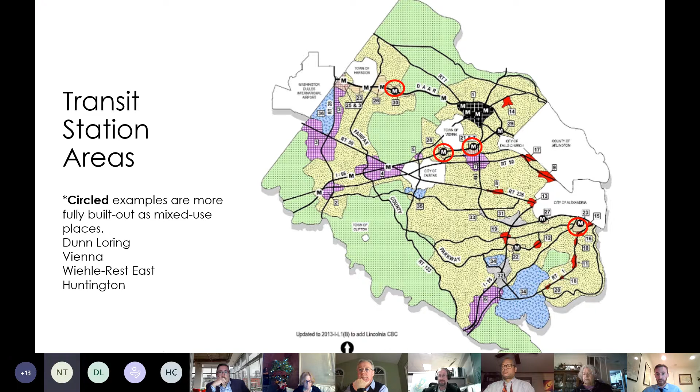And then finally, we'll also talk about Huntington. I think the question to ask when we're looking at this is what's an appropriate mix of land uses around a Metro Station. Best practices from a couple of Huntington TSA locations and others help get at that specific answer.

In general, what we're looking at in all of our TSAs is having some sort of balance between residential and non-residential uses. How that takes shape and what the exact mix is depends on the site considerations and the area of interest. Among all of the examples we're going to go through, there are specific considerations for ground floor uses, retail, support services, those kinds of things. And most, if not all, have specific considerations for the arrangement of open space in an urban context. So those are some of the best practices at the very highest level.

One thing I would reiterate is what we've been asked to study, what the board has asked the task force to study, which is the consideration of up to 1,500 net new residential units on the WMATA site, and then 95,000 square feet of net new non-residential uses. This is looking at both office and retail. One way of looking at that, if you look at proportionally how that might break down across non-residential uses, is about 39,000 square feet of retail.

I think this number is slightly off, so forgive me for this, but a larger amount of net new office space. The form is actually set in the authorization. The total heights are set in the authorization of buildings at 55 to 200 feet in total height.

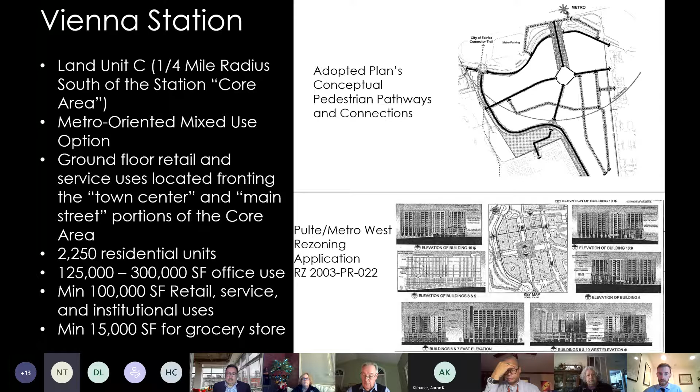At the time that this project was entitled, the comprehensive plan recommended a mix of uses: 40% to 75% residential, and 25% to 60% non-residential. Ground floor retail and support service uses were very much encouraged to add to the vibrancy and enhance the pedestrian environment for this area, not just on the ground floors facing the street, but also in a central plaza, which is the image shown right here. This concept was further illustrated through the rezoning application that implemented this plan option, where you had a proffered land use mix that included ranges for each building, about 2 to 6%, depending on the building, of the total building's square footage dedicated to ground floor retail, either at the street level or in that plaza. So within each building, about 5,000 to 15,000 square feet.

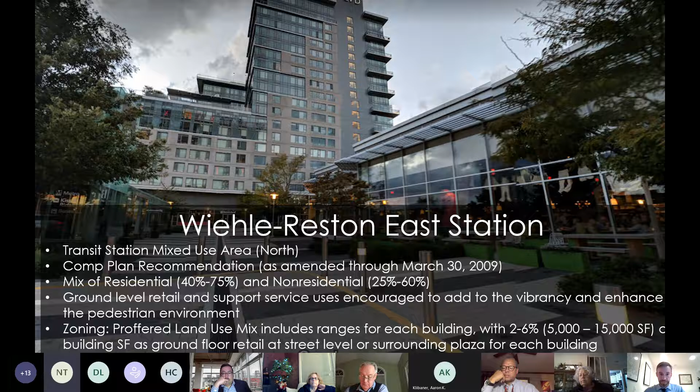This is not— excuse me, Fairfax. Excuse me, Grant, yeah, I'm sorry. One second. Hey Aaron, can you resend the link to Catherine Ward? She's trying to get in and it won't let her in. Yes, I'll do that. Thank you. Sorry, Grant. No worries.

This is another example that's not Fairfax, but very close by - as the crow flies, just to the north, across Cameron Run in Eisenhower in Alexandria. As Joanne discussed some elements of the Eisenhower East plan, this is a recently adopted update to the area plan for Eisenhower East, which is immediately across Cameron Run from the Huntington area. One of the hallmarks of this specific plan was an update with regards to flexibility for primary uses. This area right here is Hoffman Street. Immediately just behind this tree, you'll see the Hoffman Center - some of y'all may have gone there to see movies, great cinema. But this is one of the specific areas that's been outlined for ground floor activated uses.

Here's the illustration of the concept plan for Eisenhower East, which is TOD in nature. It has the Eisenhower Avenue Metro Station immediately to the south of the retail focus area. They do have a lot of flexibility with regards to primary uses, enabling a more non-residential project in one area or more residential in another - more flexibility built into this plan to enable primary uses, but with a real focus in specific areas on retail, ensuring that clustering of retail that allows people to go out, enjoy themselves, shop, and have a sense of place. So looking specifically at two locations, Hoffman Street and another area called Neighborhood 2, it's really trying to concentrate and get that critical mass of retail in some specific locations, as opposed to just requiring retail on every block or block face - really thinking critically about where retail can be successful.

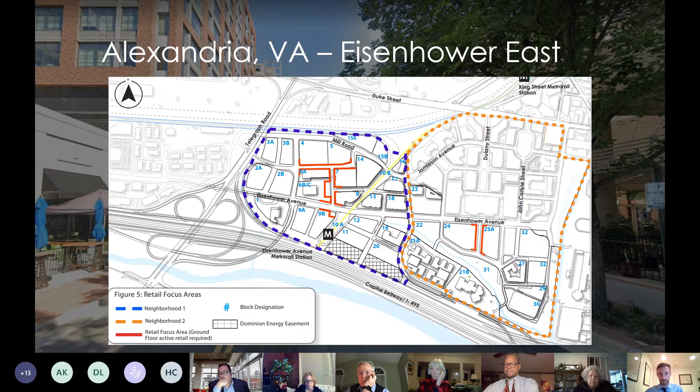Another bit further flung example of mixed use, and some pretty interesting information, from our neighbor to the north across the river, Montgomery County. They recently completed a mixed-use development study that looked at mixed-use projects delivered in the county from 2010 to 2020.

Within that time frame, they've seen about 17.8 million square feet of mixed-use development, so they've been very successful delivering these kinds of projects. They also currently have 16.6 million square feet of mixed-use development in their pipeline, so they've got a lot delivered to date and still see quite a lot coming, especially in the down-county area.

A couple of examples from their study, which I've included a link here for anybody that wants to take a look - I'm happy to drop it in the chat too, because it's a fascinating read. They've really looked at what are some of the key hallmarks of successful projects, and there's some pretty interesting perspectives on how to do mixed use right.

One of the typologies they've really dialed in on are those within a half mile of rail, and those that are not, because they do see some differences in terms of success, as well as different characteristics pertinent to those that are within that half mile and those that are not.

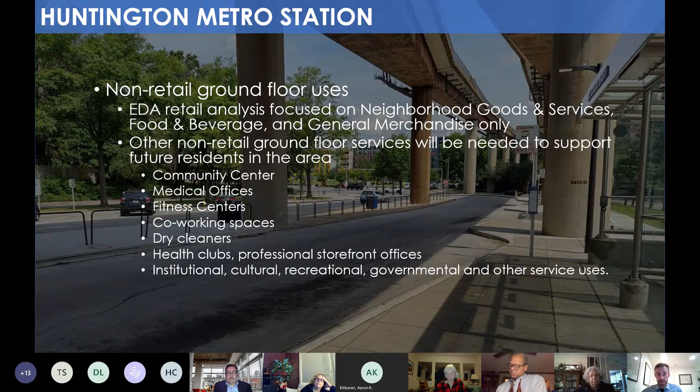So in conclusion, the main takeaway I have in looking at this is that it's really imperative that we consider the ground floor retail and service uses as part of each phase of development. Successful TOD plans in the county, between Dunn-Loring and Reston, really do provide that range in terms of having a minimum expectation in line with TOD's expectations for higher intensity development and maximum amounts of retail and service uses. There does need to be, from the literature and from our planning experience, flexibility afforded in terms of the types of retail uses and services, but there really is a need to identify priorities for locations for non-residential development, specifically at the ground floor, allowing specific areas to be targeted so we get that critical mass of retail demand.

Any questions? I know I just threw a lot at you there. I've got a couple more slides regarding other items, but I want to pause and see if anybody has any specific questions or comments with regards to retail or land use mix.

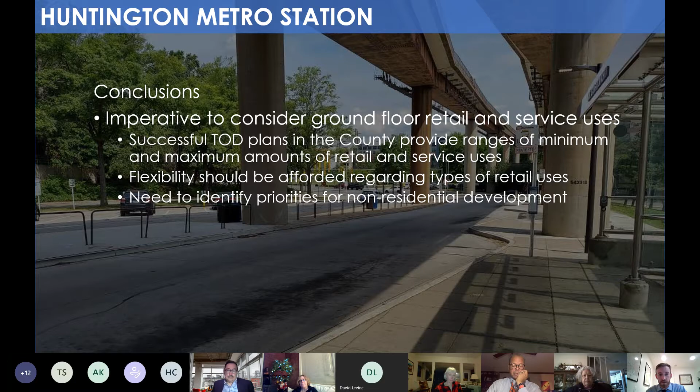A couple of items regarding phasing of development. As you all know, development for the WMATA site is anticipated to occur in phases. In both instances, both the southern and northern precincts, as we call them, southern being along North Kings Highway and northern being along North Gateway, Huntington Avenue, the phases are tied to the eventual demolition of the garages in those locations. So it makes sense that you'd have phased development, and the TOD guidelines do provide some guidance on how developments should be phased and what each phase should contain. The guidelines note that we should ensure projects are phased in such a way as to include an appropriate mix of uses in each phase of the development.

One example of this, immediately adjacent in terms of site-specific guidance, is with regards to Huntington Club, the Land Unit I guidance, where you have language noting that there should be commitments to priorities such as parks, open space, and connectivity through the site and to the metro station that should be made as a part of the phasing plan.

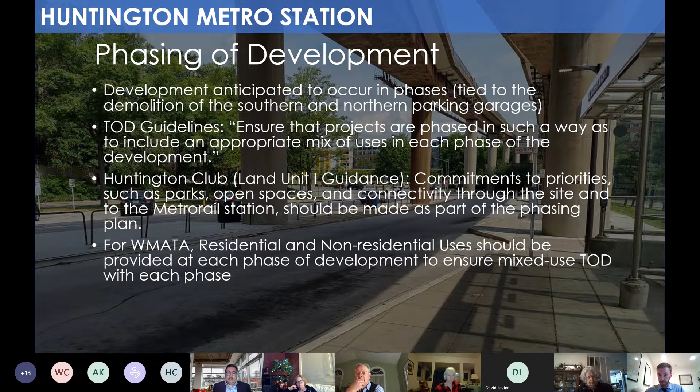So when we're thinking about WMATA sites, this mix that we had described earlier of having residential and non-residential uses provided as part of the development - one of the things we'll want to ensure is that you have that appropriate mix of uses at each phase, to ensure mixed use TOD with each phase, so that you're not waiting until the very end, for example, to get all of your retail or all of your office.

Another outstanding item is with regards to building heights. Before we talk about Huntington specifically, I wanted to back up and talk about Eisenhower, just immediately across the street. One reason is when you go out to the Huntington Metro sites and look out across to the north, it's pretty apparent how successful the Eisenhower Plan has been in terms of getting TOD level density.

One of the things I mentioned is that the Eisenhower Plan updates included a lot of flexibility with regards to use. One specific focus was retail components, and another was ensuring you have TOD level density, where there was guidance in their comp plan for building heights. So as you'll notice, the M in this location is the Eisenhower Avenue Metro Station - this is the location where the highest concentrations of height are located.

It's kind of hard to see on this screen, it's fairly small, but the red blocks are blocks 9B and 11. Those are blocks where you have a range in terms of minimum and maximum heights, a minimum of 200 feet and a maximum of 400 feet. And then from there it tapers down, as you might expect, in line with their urban concept of concentrating the highest levels of intensity closest to the metro station.

The lighter colors represent smaller building heights, shorter building heights. So across the blocks you have a reduction in terms of both the minimum and maximum building heights - 300 feet and 150 feet - and then all the way down on some of the edges to, I think in one case, about 75 feet in terms of minimum height.

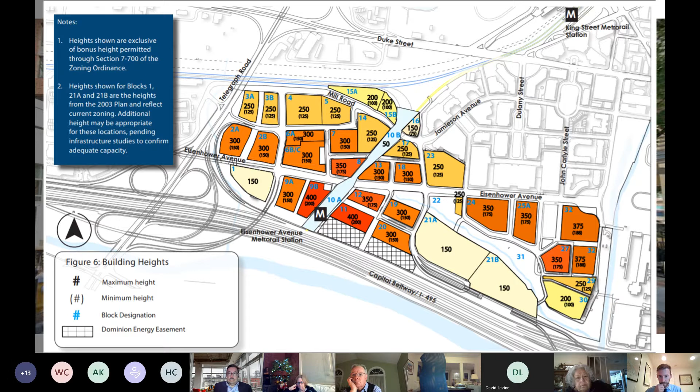So looking across the way to our area, to the Huntington TDA, on the left-hand side we have the height map for the Huntington Transit Development Area. I'll reiterate, this is one of only 10 locations in the county, in addition to Tysons, where high-rise is encouraged and really can be considered. So in terms of the real estate for high-rise in the county, there are relatively few locations where we consider heights of this size, so we want to be economical in terms of the types of buildings we can expect in these areas.

A couple of things to note with regards to the adopted plan guidance. The first is that our site is located in the dead center, as you know. There is no current height limit to these areas, however there is no planned residential or office use in these locations - it's just WMATA's operation that's planned here. So that makes sense.

A couple of other things: the Huntington Club, immediately to the west, contains a tapered height recommendation. In the areas closest to the station platform, you see a height recommendation of a maximum of 200 feet in total height, and then the area to the west and south of that tapers down to 55 feet at the property edge. That's mostly due to the fact that you have single-family homes immediately across North Kings Highway from the site. So the idea is that you have some tapering and compatibility with the building types immediately adjacent across the highway.

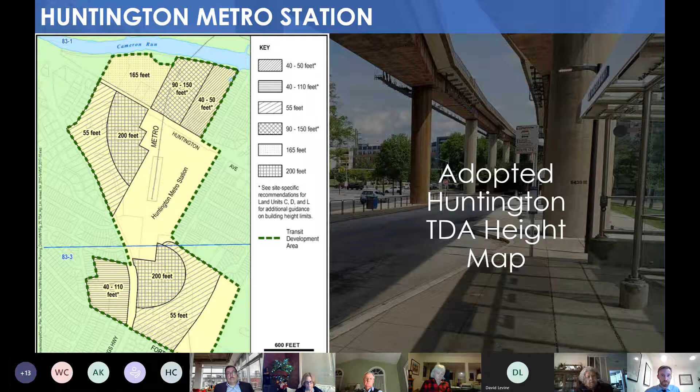So what does it look like in terms of the area today in relation to what could be in total height? This is a view of North Kings Highway looking south towards the courts at Huntington Station on the left, and the Huntington Station Shopping Center on the right-hand side.

As you can see, right now the courts at Huntington Station are four-story buildings, not approaching the TOD level of 200 feet in total height. Density is closer to that 55 feet in total height. And then there's one story of retail and shopping at the Huntington Station Shopping Center.

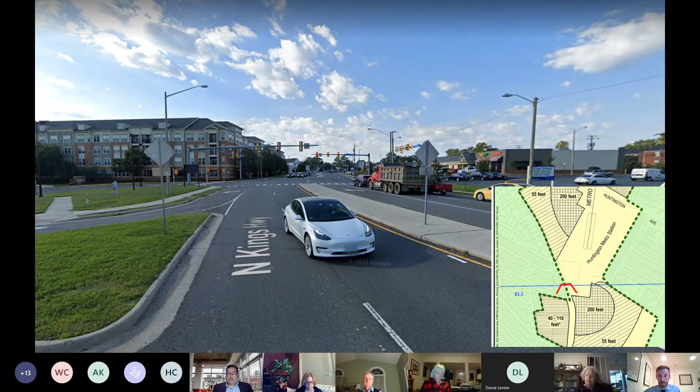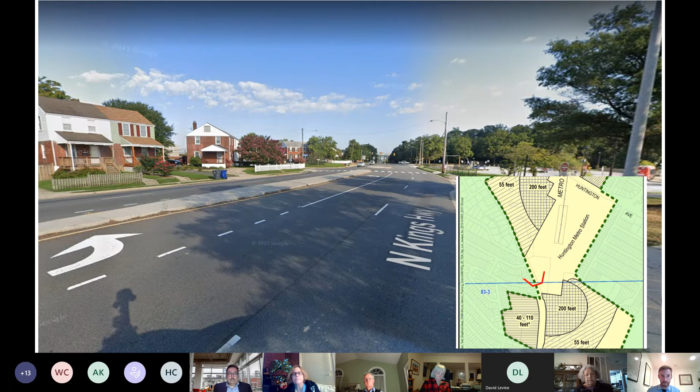Looking to the north, same location, just turned around. So this is looking north on North Kings Highway. You have duplex development across the street in the Jefferson Manor neighborhood, which is a conservation area planned to remain. That's a duplex level development, not terribly tall, a lower density residential building type.

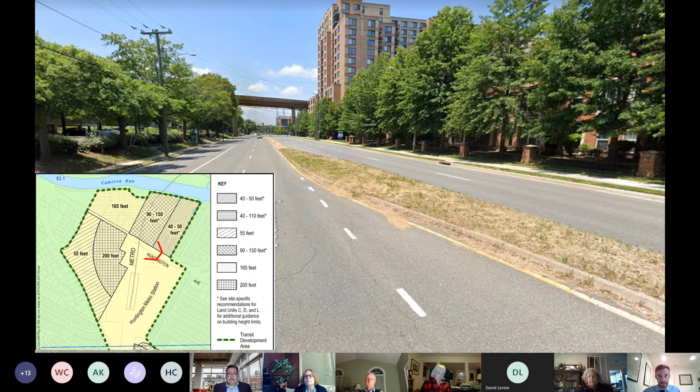On Huntington Avenue, there's a bit more variety in total height. You have one high-rise building located in that 90 to 150 foot height zone, which is kind of a focal point for the Huntington Avenue streetscape and frontage. Further along the track, you have the Parker, which is built out with a mid-rise product, though the plan recommendation does allow for up to 165 feet in total height.

Turned around, this is looking east along Huntington Avenue, same location, just flipped 180 degrees. There are duplexes in the Huntington neighborhood immediately on the periphery of the corner. This is an area in particular where some edge considerations for new development near the Huntington Metro Station should potentially be considered.

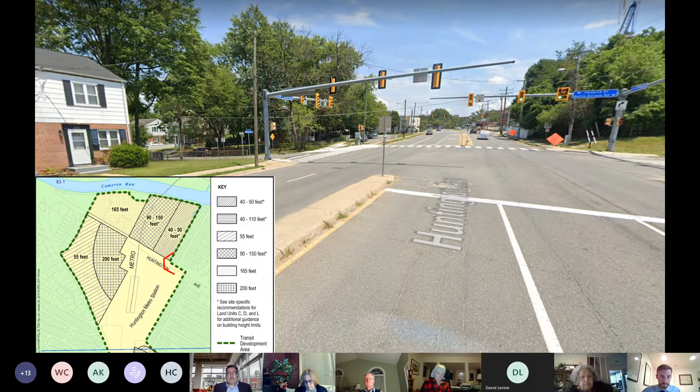These are the areas where high-rise and some mid-rise development would be appropriate along the North Kings Highway frontage. There is a consideration regarding tapering, or potentially a daylight plane or line of sight, whatever language you'd like to use, to ensure a tapering effect along the North Kings Highway frontage, given the lower density residential developments across the street.

I would argue that since this is a metro site, the edge consideration might not necessarily be the same as what you see at Huntington Club. However, I do think there should be some consideration for tapering the height and form down as you get closer to North Kings Highway, for compatibility reasons.

Finally, I don't have much information on this, but I think the WMATA team will share information regarding the tunnel. As you all know, the Huntington Metro Station goes into the hillside, and there's a tunnel that runs about a quarter mile further south of the platform. That carries with it some considerations regarding the types of structures that can go over top of that, so I'll let them speak to how that influences the development program in particular.

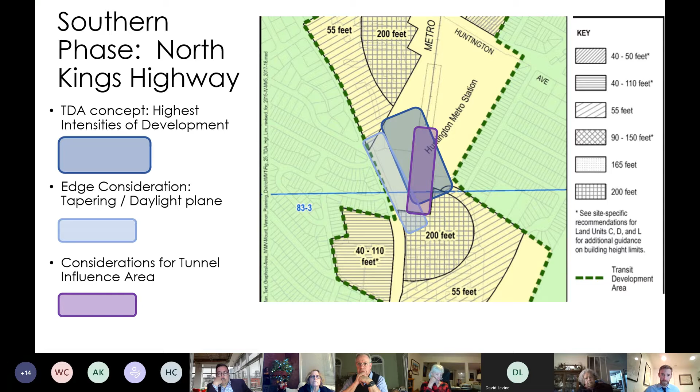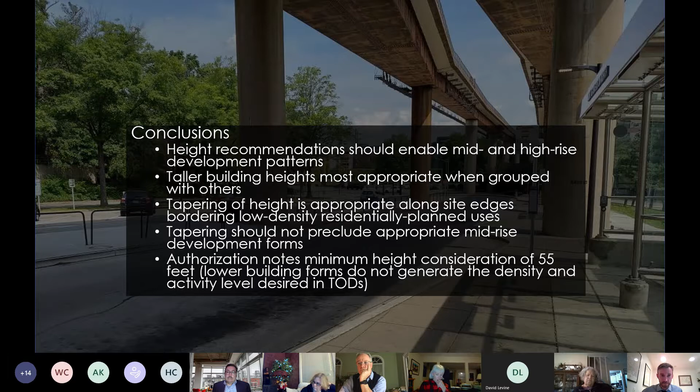So a couple of key takeaways with regards to height. Height recommendations that we put on this site should enable mid and high-rise development patterns. Taller building heights are most appropriate when they're grouped with others, providing a great skyline, and this also allows them to take advantage of the grouping in terms of urban form.

Tapering height is appropriate along site edges bordering lower density residential and residentially planned uses. So those areas that are specifically adjacent to the duplexes and single family uses surrounding the site do warrant some consideration with regards to tapering. I'd also note that the board's authorization does note a minimum height consideration of 55 feet. So lower building forms, which don't really generate the type of density and activity level that are desired in the TODs, might not be appropriate for this specific site.

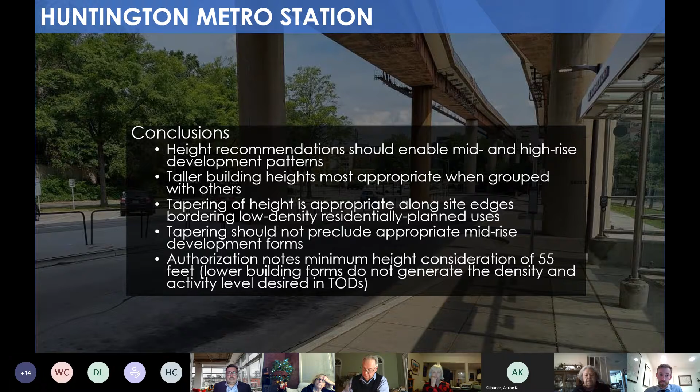I'm wondering how you could take into consideration the slope in determining building heights. Do you try to put taller ones at the bottom of the slope, or put them all at the same height up and down the slope? And when you're thinking of a view from the top—I don't know—I'd like to see a 3D model of that. How do you take that into consideration?

Sure, here's what I can do. I will send you a diagram and then also kind of an explanation in terms of how they do it for zoning purposes, because I think it's one of these concepts that's probably best illustrated when you have a section showing the grade and then how height gets measured. So happy to forward that along to the task force. Okay, great, thanks. Sure.

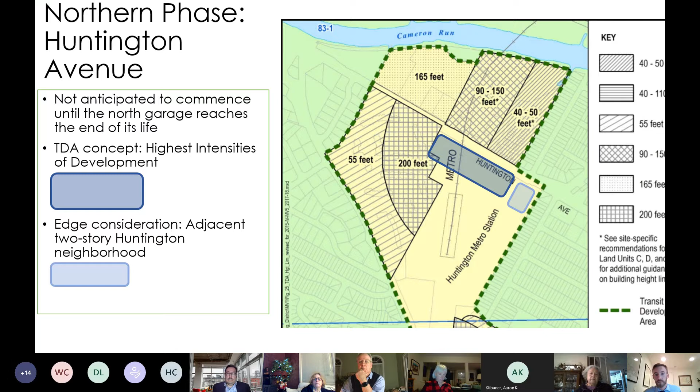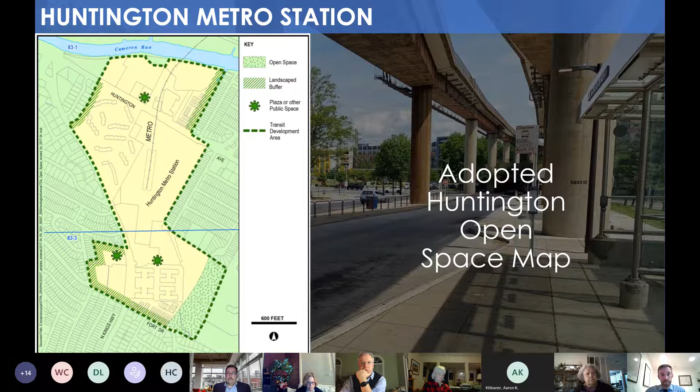This is the high slope area currently in an easement for stormwater purposes, with a lot of mature vegetation. The area immediately to the east, on the other side of the middle garage, was regraded as part of the middle garage construction but has also been replanted, where you see a lot of fledgling but thriving vegetation.

So this is another area of existing green space that's currently not in an easement, but when we're considering trade-offs in terms of the developments closest to North Kings Highway that encroach into a portion of that easement area, this is an area where considerations for green space and potential swapping of easement area could be considered.

And then finally, you have this area along Huntington Avenue between the elevated rail and the north garage. It looks small—it is relatively small—but has kind of a more intimate feel. It's a nice area for bringing people into the northern end of the metro station today.

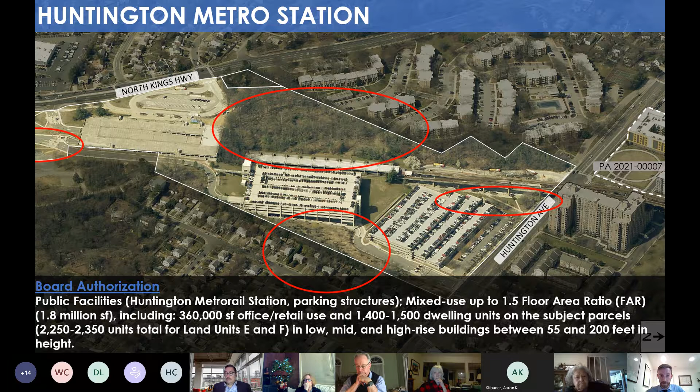And then looking at the overall area in terms of the open space network, a couple of features here. One, from left to right, again: the Aventon Park, the area surrounding the Aventon, is shown in this concept as a green area. I'd mention that as we're thinking about the appropriate mix of uses within each phase...

...this is one area that's relatively small in terms of its block, but might be appropriate for some type of more active use for a building—potentially a non-residential building. One of the concepts that WMATA will show describes this area with potentially non-residential uses, potentially as an office use, reflecting what's entitled there.

The next one is one of the main open space areas, immediately above the BRT station. This is the urban park located on top of that station area, and can serve, I think in a lot of respects, as the central gathering point for the TOD potentially. So the development of that park should be very thoughtfully considered.

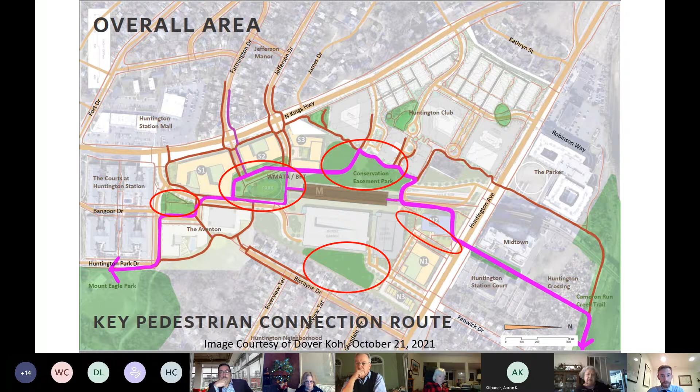And that's about it. Does anybody have any questions regarding open space, heights, anything we've gone over tonight?

Graham, can I suggest, given it's 7:45, we just let the WMATA team make their presentation there and maybe hold the questions to the end. Fine with me, of course.

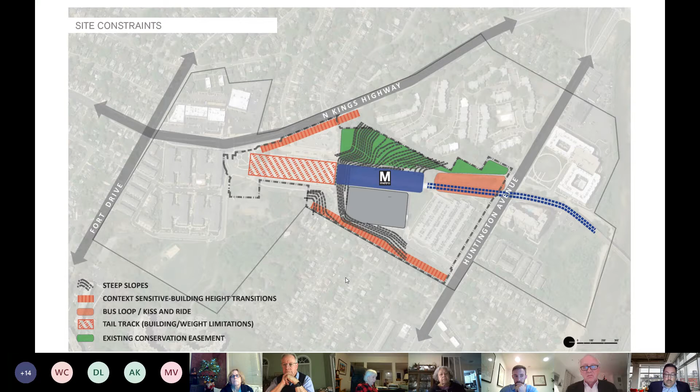Additionally, there are some height transitions to consider, and I think Graham touched a little bit on that—basically when we're confronting or backing onto lower density homes from a compatibility standpoint.

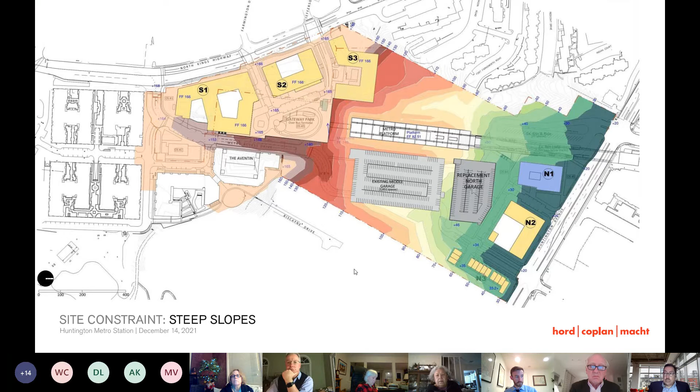This diagram illustrates how much elevation change there really is on the site. Each color change represents 10 feet of elevation. There's about 140 feet of grade change from Huntington Avenue on the low side to North Kings Highway on the high side. The flatter areas are to the south, indicated in the beige area, with plus or minus 10 feet within that area.

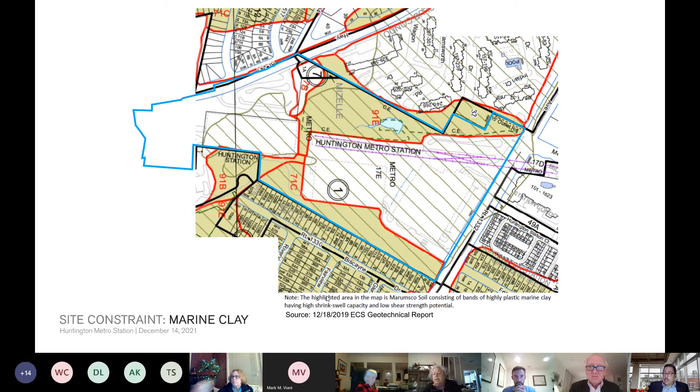Marine clays: this exhibit indicates areas with probability of marine clays, which can hamper building construction. Most of these areas are limited to the forested portions or the steeply sloped areas, including the designated conservation area. Outlined in blue is the property line.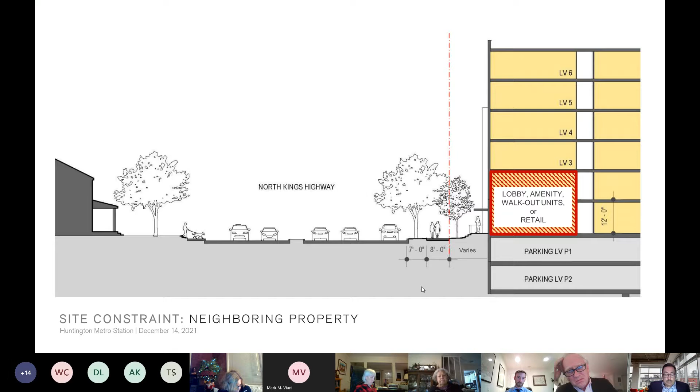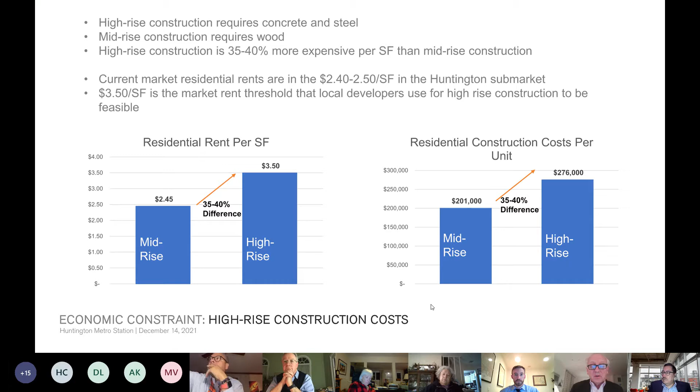I'm going to turn it back over to Miguel. Okay, thanks. Now we can start talking a little bit about the plan itself.

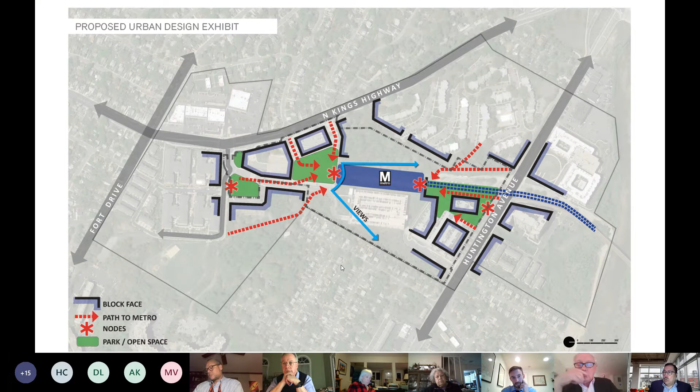We also did a little bit of a deeper dive with regards to showing you more open space, and I'll get into that a little bit later.

We're not too far off from what Graham has shown with regards to this. In fact, I think we're very close to having a very similar strategy for pedestrian connectivity.

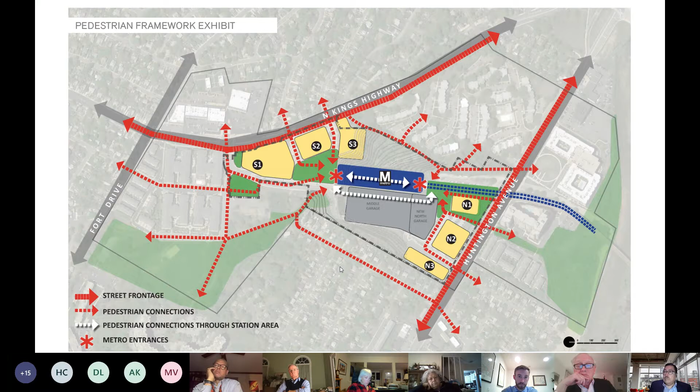There is ancillary retail or some other activating use located at the corners of the buildings, oriented towards North Kings Highway. Now, North Kings Highway is not a cozy street. It's anticipated there could be cafe seating there on a limited basis, but really there are probably better places for that type of retail—not to say it couldn't be there.

And what happens in the middle of the building, as I mentioned before, could be stooped entrances to the residential units, or exposing some other building amenity out to the street.

And there's a second public open space on the south side, located in front of the Aventon Apartments, which I think Graham started to describe, located right here. It is contained nicely by building face.

So the middle part of the site still remains as the Metro platform, which is that dark blue area. Also, the north end, that's the middle portion, is comprised of 4 blocks, essentially N1, N2, N3, and also the replacement garage for the metro. It's typically a high-rise office building, N1, nearest to the metro portal.

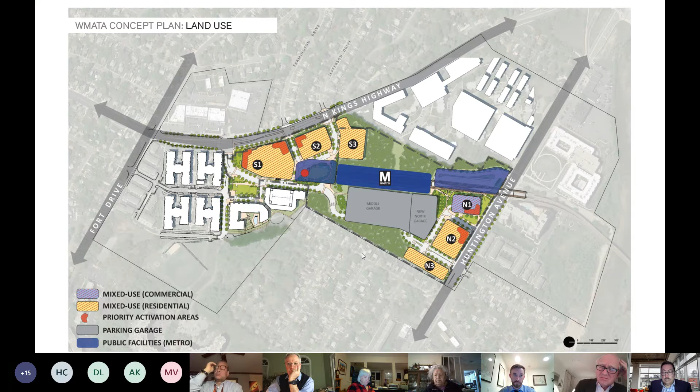In terms of density, the WMATA plan proposes about 1,040 to 1,150 residential units of varying types. There's 246,000 square feet of non-residential uses, and the total gross square footage is 1.389 million square feet. The gross density based on the 29-acre site is 1.09 FAR.

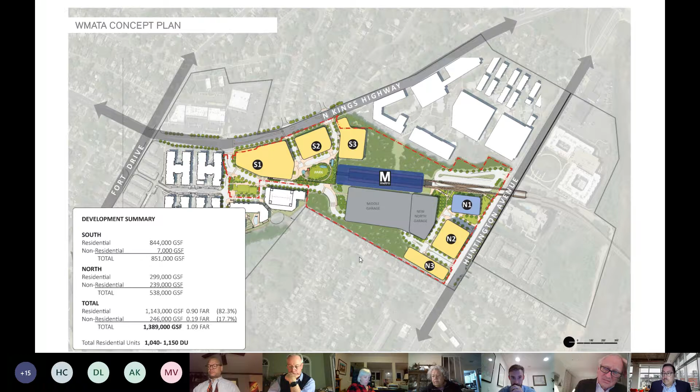Just a little bit more detail with regards to what happens on these blocks. Each block is indicated with a unit count, a maximum height, and parking for each of the blocks. From a height standpoint, this is in keeping with what Graham had mentioned: this is a 13-story building right next to Metro, and then everything on the north side, with the exception of N3, is essentially 18 stories and 18 stories. So we're approaching that 200-foot height limit with buildings that are closest to Metro.

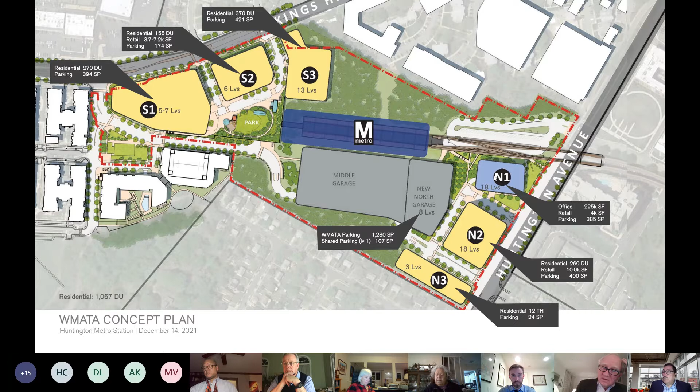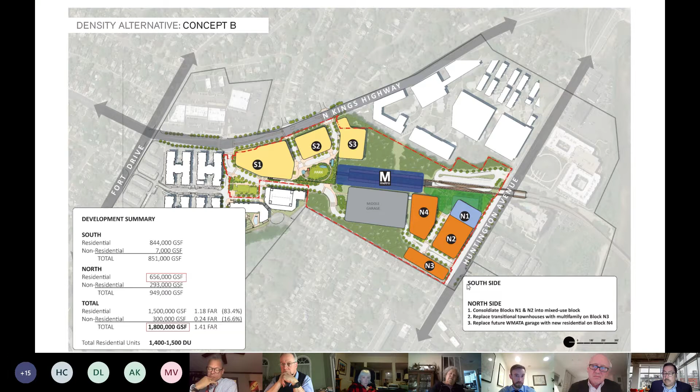With regards to building heights and so forth, on the south side it would essentially remain the same as the WMATA concept plan, but you'd get additional height here at N4. So nearest Metro on the north side, you have a 15-story building, an 18-story building, and an 18-story building, and then this bumps up from 3 to 6 to 7 levels. So you're getting considerably more height on the north side with this concept plan.

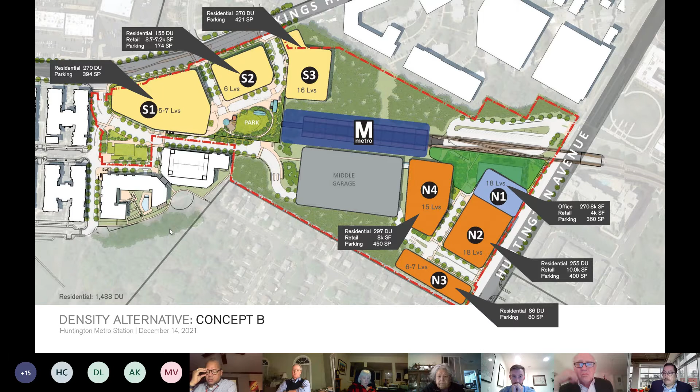Next, we analyzed the buildable land area to see how it related to the gross and net density. The gross site area is 29.57 acres and contains a significant area dedicated to transit facilities, conservation areas, and other forested or unforested sloped areas. We have delineated these areas as non-buildable, outlined in red.

As I mentioned before, the north end of the site is where the redevelopment would occur. We have shaded these areas in yellow. 13.74 acres, or 46% of the site, is essentially buildable.

So the effective density, when you start—we were looking at density on the gross, but when you look at the effective or net density for density plan A, or for the WMATA concept plan, it's at 2.32 FAR, compared to the gross density at 1.09 FAR.

But the effective or net density for density plan A, which is the second plan that I showed you, is nearly 3 FAR—2.99—compared to the gross density proposed for that plan at 1.41 FAR.

So I think this analysis just shows the difference between net and gross density, because when you look at it from a net standpoint, getting into that 2.3 FAR is a TOD density that we're all trying to achieve here.

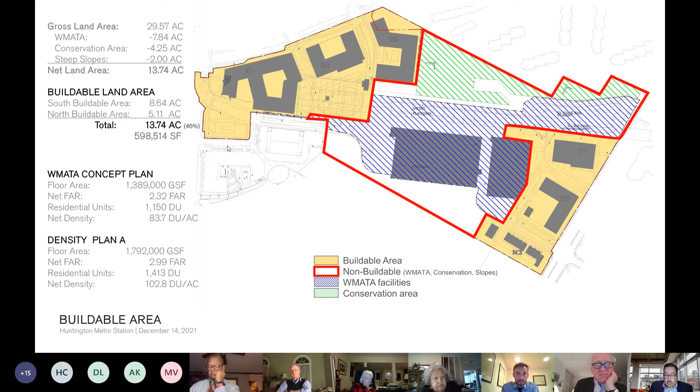With regards to open space, we analyzed the WMATA plan, shown here, and broke it down into various types, such as public urban parks, streetscape, some residual open space, private open space, and conservation areas. We excluded street pavement, WMATA facilities, and building footprints for this exercise.

The WMATA plan provides about 13.29 acres of open space of all types, whether conservation area or people spaces. The people spaces are the dark green, which we call public urban parks, landscaped and designed to a much higher degree of meaning in terms of pedestrian friendliness, as opposed to the streetscape, which is really a conduit for pedestrians.

I should also mention that with the WMATA plan providing 44.9% open space, it's critical to understand there's a requirement for urban parks based on unit count. This WMATA plan requires 3.06 acres and provides 3.37 acres of urban park area, so we're just a little bit over our requirement with regards to urban parks.

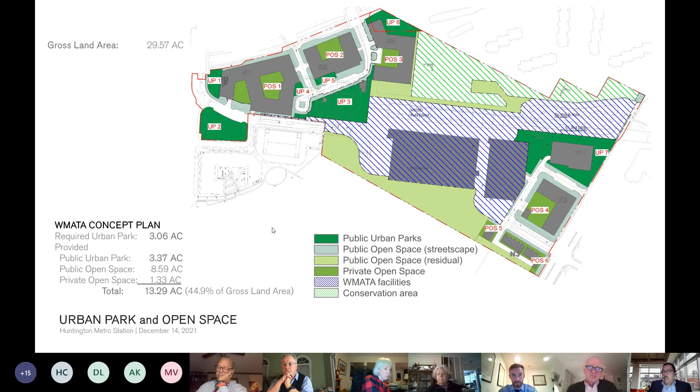We did a similar analysis for density plan A, and the big difference there is UP2, where we placed a building right on top of the Abington Green. That reduces our urban park space by about a half acre, and our total open space provided is slightly less than 13 acres, at 12.95.

I think the reason is that as soon as you add residential units, you have a higher requirement for this number—4.03. This one's showing a deficit of about an acre, mainly because of this, plus we're adding a lot more units.

So with regards to that, it's a decision that would need to be made: do you give up a public space here to put a building in, in order to get some additional density out of this?

This ends my presentation on this. Certainly open it up to any kind of questions you might have.

Yeah, that was a lot, and Miguel went through it fairly quickly, just recognizing that Graham had already set the stage with a lot of information. But we wanted to show how some of these concepts could be fleshed out, and give you a sense of some of the trade-offs we'd start to deal with for this particular site. And I think that concludes it.

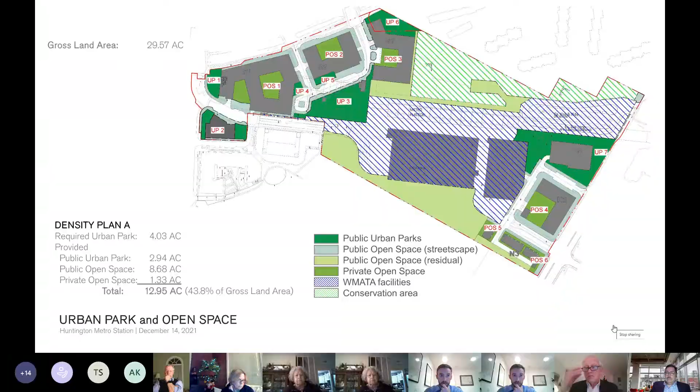Well, if no other comments, again I want to thank the excellent presentation from Miguel and Graham, and thank you to staff and everyone who participated and helped put this together. I know we've gone over a little on time, but we covered a lot of great information, and I think it's going to continue to help us move forward with the project.

And Neil, at least you have RDI and the Huntington Club to look toward. Yeah, we'll see how that goes. I sent them a congratulations note the next day saying, you did it. Right, so there should be some great lessons learned there, and I hope you all continue the dialogue and coordination between the two projects. We talk to them regularly, and they're certainly ahead of us. I certainly hope we catch up with them, but we're trying our best.